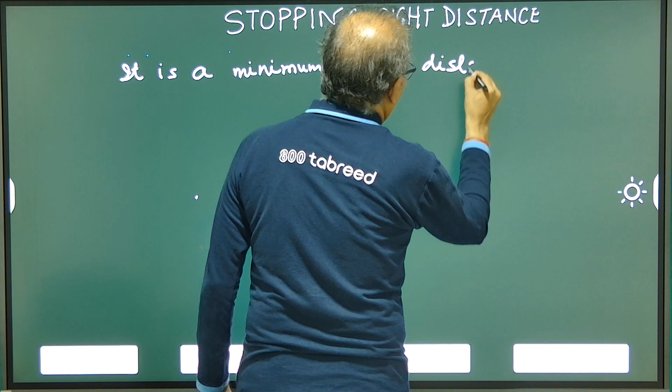Stopping sight distance: it is a minimum sight distance available at any spot of the roadway.

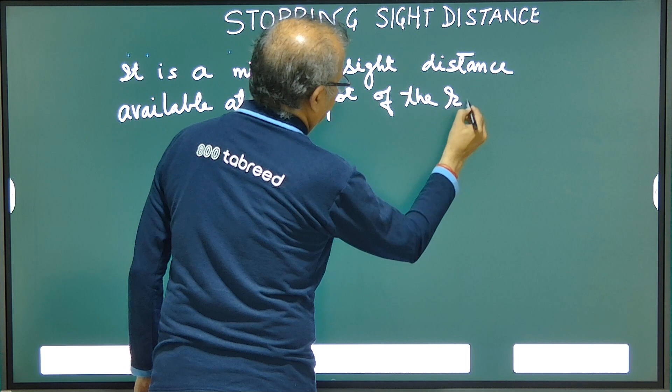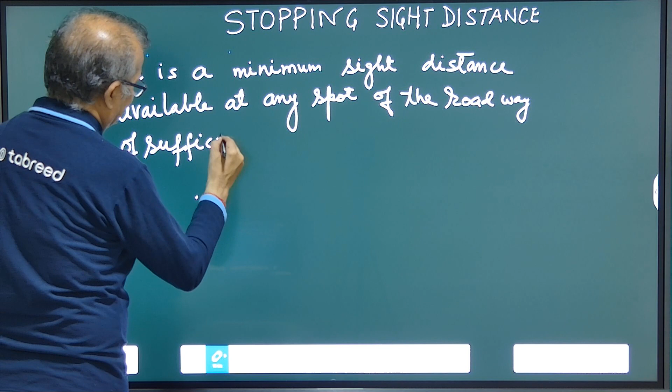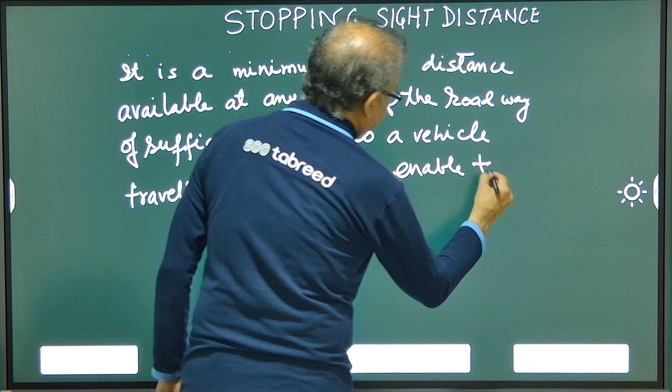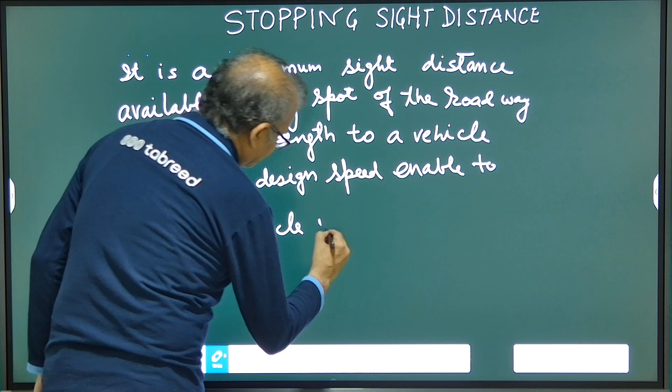Of sufficient length so that a vehicle traveling at design speed can stop upon seeing the obstruction ahead of him. So, of sufficient length to enable a vehicle traveling at design speed to stop the vehicle without collision with a stationary object.

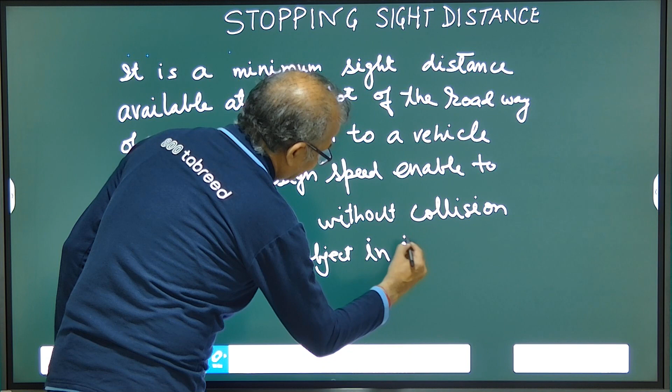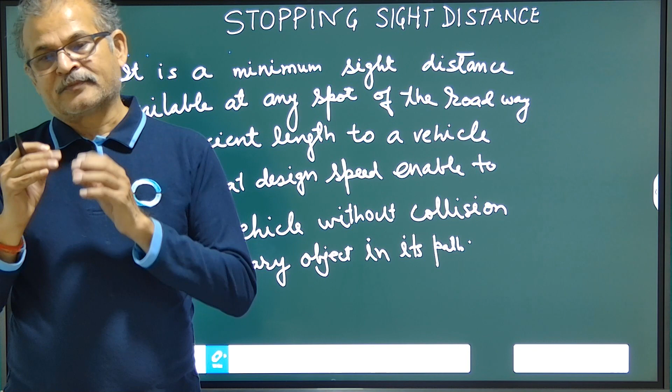In short, जब कोई व्हीकल ट्रेवल कर रही हो डिजाइन स्पीड से, तो जब कोई स्टेशनरी ऑब्जेक्ट देखे अपने रोडवे पे, तो उसके पास इतना सफिशिएंट लेंथ होना चाहिए कि वो अपनी गाड़ी को रोक सके। अब उसको दो पार्ट में उस लेंथ की रिक्वायरमेंट होती है। द मोमेंट वो व्हीकल जब किसी ऑब्जेक्ट को देखता है तो उसके मन में एक भावना आती है कि अब करना क्या है, गाड़ी को रोकना है या पास करना है, उसका एक टाइम उसमें चला जाता है।

जबकि जो व्हीकल होती है वो अपनी स्पीड से चल रही होती है, तो इस लैप्स टाइम, जिसे लैग डिस्टेंस भी कहा जाता है, कितना व्हीकल ट्रेवल कर लेगी उस लैग डिस्टेंस में, दैट इज बिफोर एप्लीकेशन ऑफ द ब्रेक। तो जो एक लेंथ ट्रेवल करती है वो, और फिर ब्रेक के बाद में जो काइनेटिक एनर्जी ऑफ द व्हीकल होती है उसके द्वारा अगेंस्ट द फ्रिक्शनल फोर्स जब तक रेस्ट में नहीं आती है, डिस्टेंस ट्रेवल करती है, तो दोनों को मिलाकर स्टॉपिंग साइट डिस्टेंस होता है।

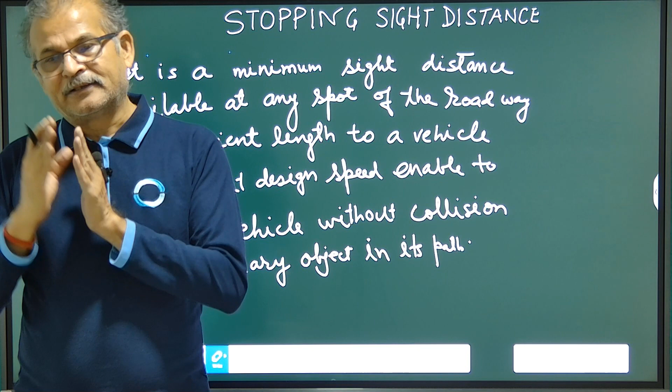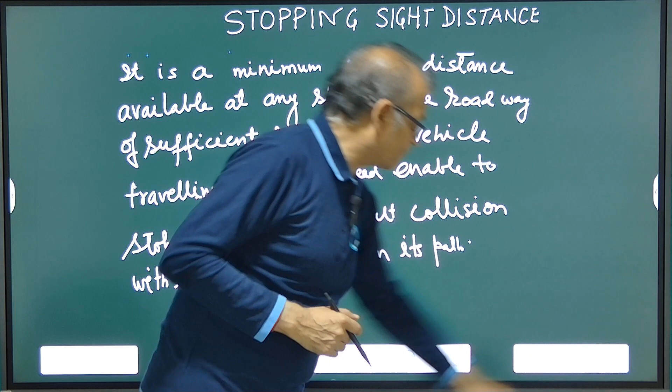तो स्टॉपिंग साइट डिस्टेंस दो कंपोनेंट में होगा। एक तो व्हीकल ट्रेवल ड्राइवर परसेप्शन एंड रिएक्शन टाइम, दूसरा अपॉन एप्लीकेशन ऑफ द ब्रेक, इंस्टेंट ब्रेक एप्लीकेशन करेगा तो व्हीकल कितनी डिस्टेंस पे जाकर के रुकेगी। तो दोनों डिस्टेंस के कॉम्बिनेशन को स्टॉपिंग साइट डिस्टेंस कहते हैं।

ये जो स्टॉपिंग साइट डिस्टेंस होगा, ये डिपेंड करेगा रोड के फीचर्स पे। वर्टिकल अलाइनमेंट है, हॉरिजॉन्टल अलाइनमेंट है या स्ट्रेट रोड है, तो इसका जो लेंथ होगा इट विल डिपेंड ऑन द रोड फीचर।

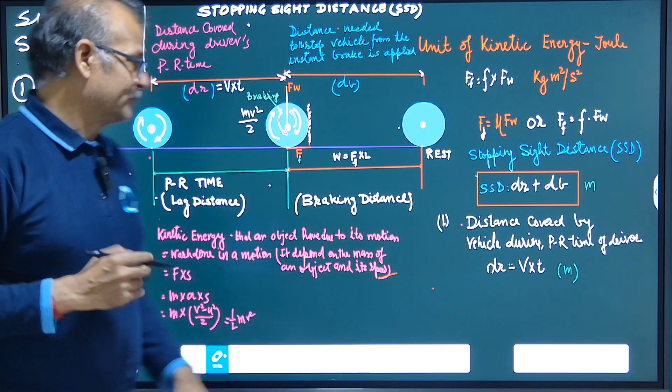और ड्राइवर की आई हाइट फ्रॉम द रोड सरफेस। ड्राइवर वो कितना ऊंचाई पे बैठा है, जिससे वो कितना लेंथ को देख सकता है। जितना ऊंचाई पे बैठेगा उतना ही रोड आगे ज्यादा विजिबल होगी। इट विल डिपेंड अपॉन द ड्राइवर आई फ्रॉम द रोड सरफेस।

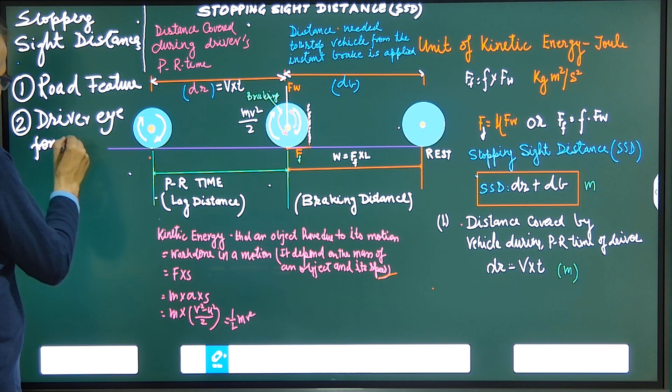फिर हाइट ऑफ द ऑब्जेक्ट कितना है, जो ऑब्जेक्ट को विजुलाइज किया जा रहा है कितना, तो उसके ऊपर भी डिपेंड करेगा। हाइट ऑफ द ऑब्जेक्ट।

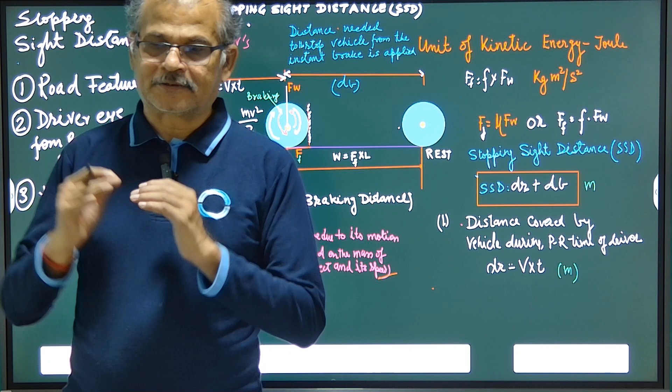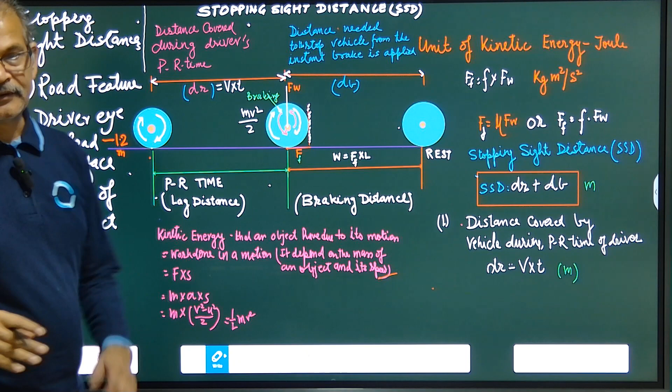IRC में, जो कैलकुलेशन पर्पज के लिए ऑल कैलकुलेशन में एक पैसेंजर कार को लिया गया है, जिसमें ड्राइवर की हाइट फ्रॉम रोड सरफेस 1.2 मीटर ली गई है। और स्टेशनरी ऑब्जेक्ट ऑन द रोड सरफेस उसकी जो ऊंचाई ली गई है दैट इज 15 सेंटीमीटर, यानी 0.15 मीटर ली गई है।

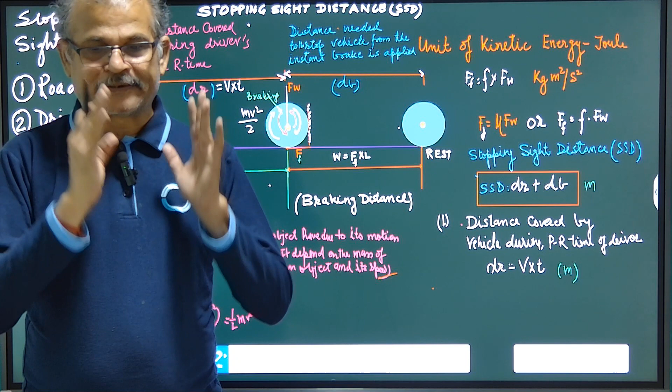तो जैसा कि हमने पीछे बताया कि जब कोई गाड़ी रोड पे ट्रेवल कर रही हो, अपॉन सीइंग एनी ऑब्जेक्ट, उसके पास एक टाइम जाएगा उसको परसीव करने पे, उसके रिएक्शन में, उसके एप्लीकेशन में, ब्रेक रिएक्शन टाइम, फिर वो ब्रेक लगाने में।

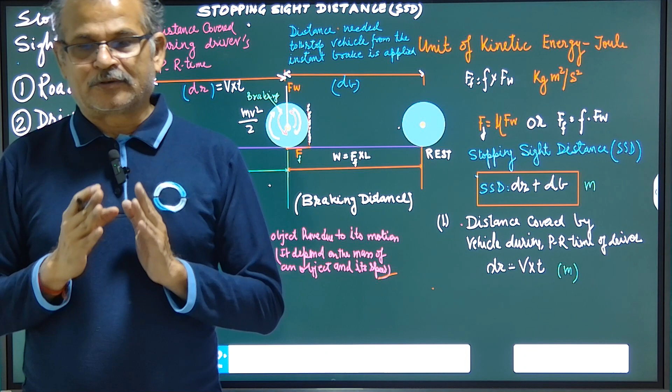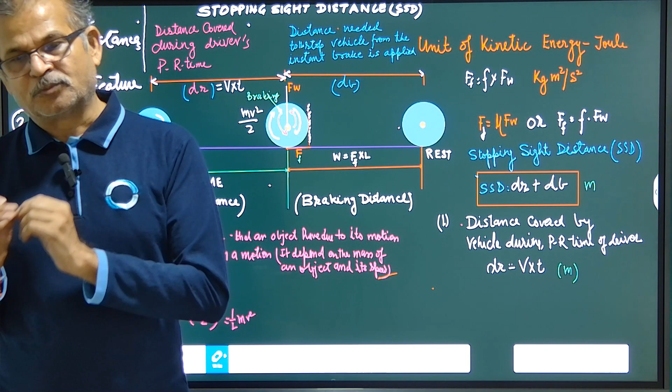तो दैट टाइम लैप्स इज नोन एज लैग डिस्टेंस। और इसको जो व्हीकल की वेलोसिटी होगी और टाइम लैप्स उसके मल्टीप्लिकेशन से पाया जाता है। तो वेलोसिटी ऑफ व्हीकल जो भी डिजाइन स्पीड होगी या जिस भी स्पीड से चल रही होगी, और उसका परसेप्शन टाइम जो कि 1.8 सेकेंड से 2 सेकेंड तक के बीच में होता है, पर फिर भी IRC में 2.5 सेकेंड दिया गया है। तो टाइम लैप्स विल बी 2.5 सेकेंड।

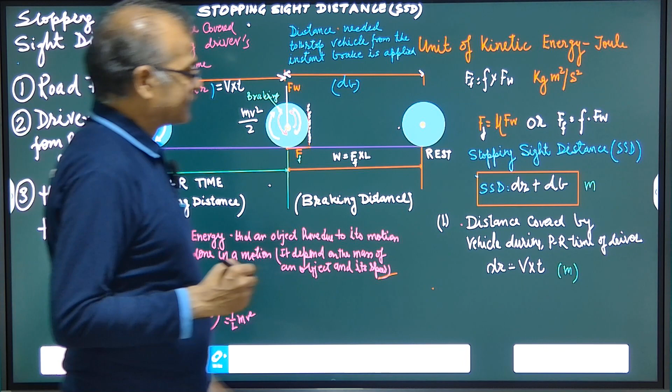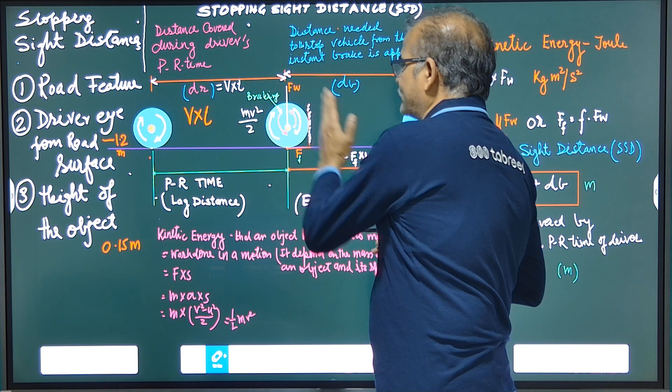So lag distance, distance covered during the driver's PR time - its value will be distance covered by the vehicle in PR time, that is given by dr, and it will be velocity multiplied by time. So dr will be equal to v into t, and the braking distance will depend upon the kinetic energy of the vehicle। और जब काइनेटिक एनर्जी को हम स्टॉप करते हैं ड्यू टू ब्रेकिंग फोर्स, तो ये गाड़ी रेस्ट में आएगी ड्यू टू frictional force applied between the tire and the road surface.

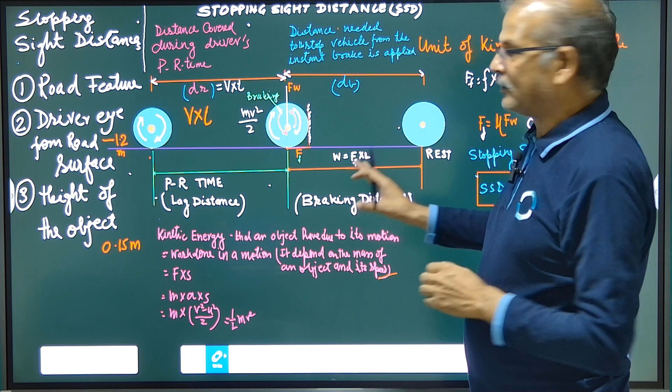So how to find out braking distance? Let us see the calculation of braking distance.

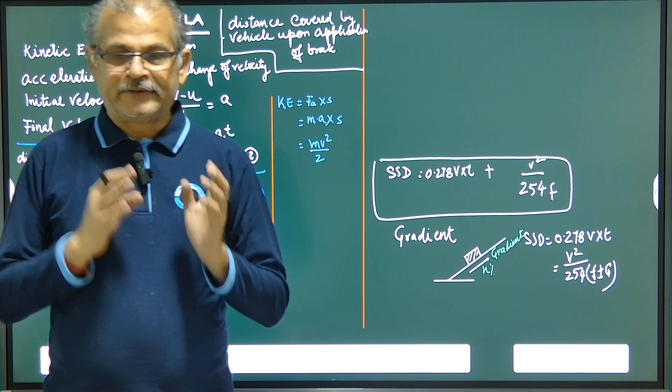So we know that acceleration होता है rate of change of velocity। तो मान लीजिए कोई व्हीकल की इनिशियल वेलोसिटी u है, फाइनल वेलोसिटी v है, तो v माइनस u, फाइनल वेलोसिटी माइनस initial velocity divided by time will be known as acceleration. So v is equal to u plus at - that is kinetic motion का फर्स्ट लॉ भी है। How we derive it? If initial velocity is u, final velocity is v, so v minus u by t will be the acceleration, and then v is equal to u plus at, and we find out time v minus u over a.

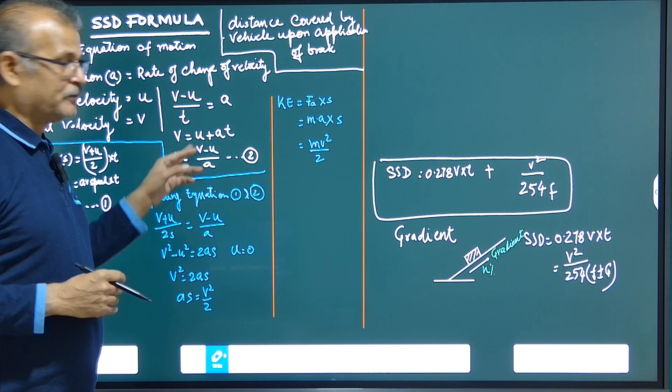Now second, we know that distance is velocity into time, or speed into time.

There will be average speed, initial speed when the vehicle has started, and the final speed where we are making the measurement. So average speed will be, if initial is u and final is v, plus u by 2, and time taken by that vehicle is t. So v plus u divided by 2 into t is equal to s, means distance will be average speed v plus u divided by 2 into time. So we can find out 2 into s upon v plus u will be the time.

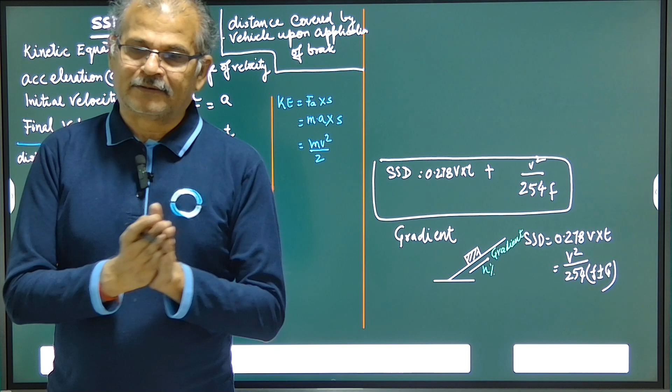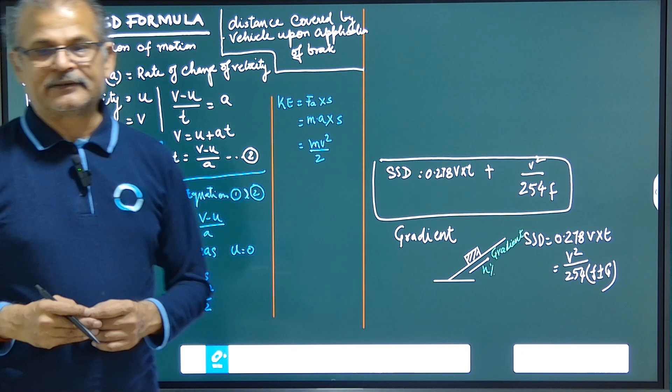Since initial velocity of any vehicle would have been zero only, it started from zero, accelerating in time t to v. So u will be 0, v square equal to 2as, or we can say as is equal to v square by 2. Now work done, we know the kinetic energy is work done in motion. Any moving body, as much distance it covers, that is work done by that vehicle in motion. So kinetic energy is work done in motion, that is force due to acceleration into distance.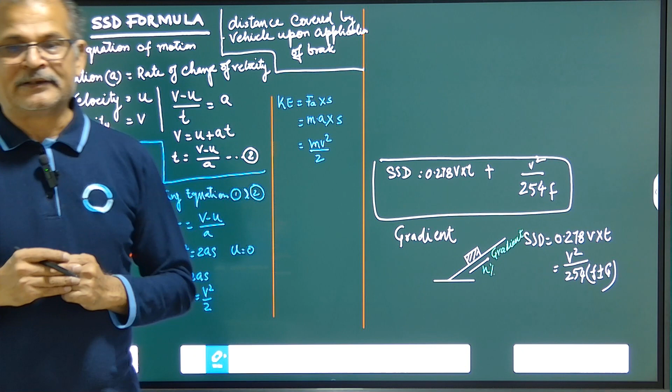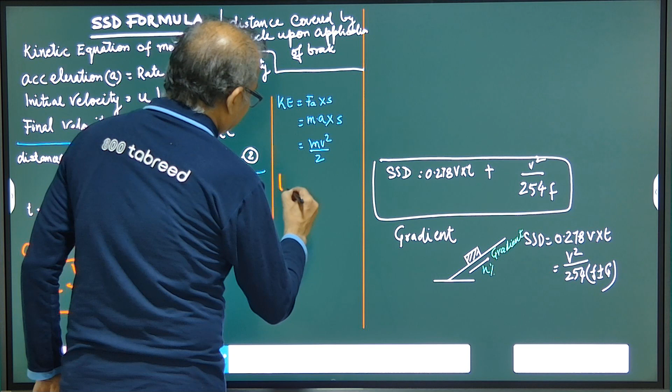So force due to acceleration is Fa into s, and we know Fa is nothing but m into a into s, and we found out as is v square by 2. After putting the value of v square by 2, we found kinetic energy Ke is equal to mv square by 2.

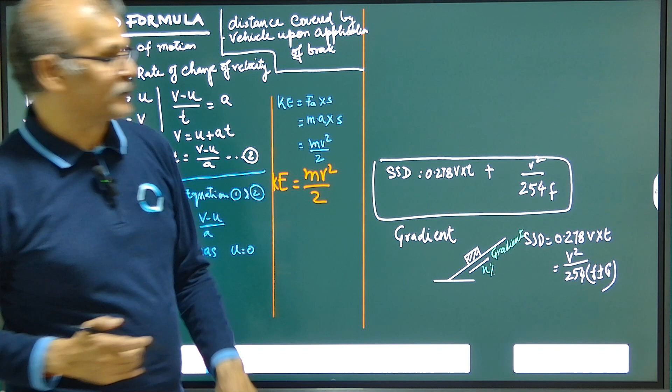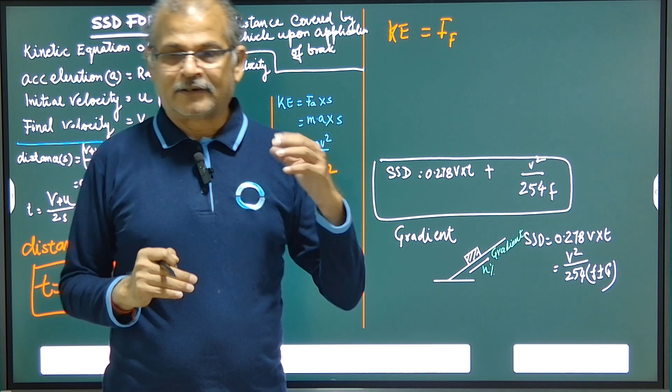Now this mv square by 2 will be, when the brake has been applied, it will be resisted by the frictional force. Vehicle will come to stop after the kinetic energy is exhausted due to frictional force. So kinetic energy will be equal to frictional force due to road surface and the tire into distance covered.

So the braking distance will be L, or we can say distance due to braking db. So Ke we found is mv square by 2. F we already know the relation between F and the gravitational force, means weight of the vehicle. So mu is equal to...

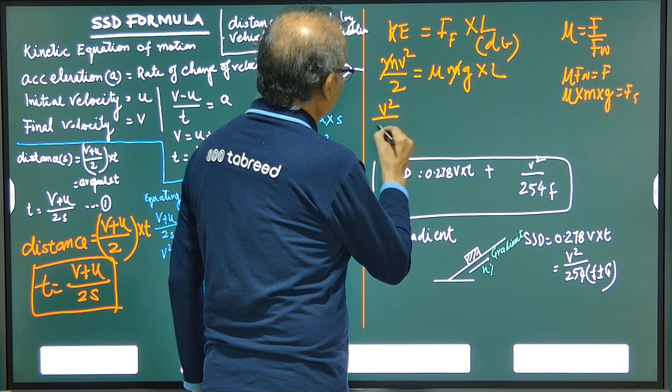F upon gravitational force due to the vehicle's own weight. So mu into Fw is equal to F, and Fw is nothing but gravitational mass into g, m into g is equal to F. So let us input mu into m into g into L. M gets cancelled. Now v square upon 2 mu into g is equal to L, or db, distance covered by vehicle after application of brake.

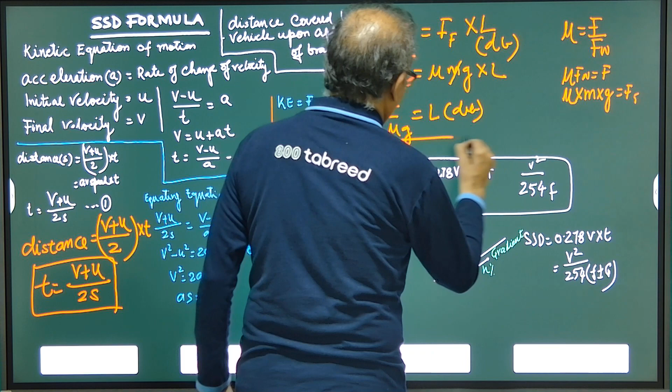So in this case, stopping sight distance will be the lag distance, that is v into t. So stopping sight distance will be equal to lag distance v into t, plus braking distance v square upon 2 mu into g. Mu is also coefficient of friction, also represented by F.

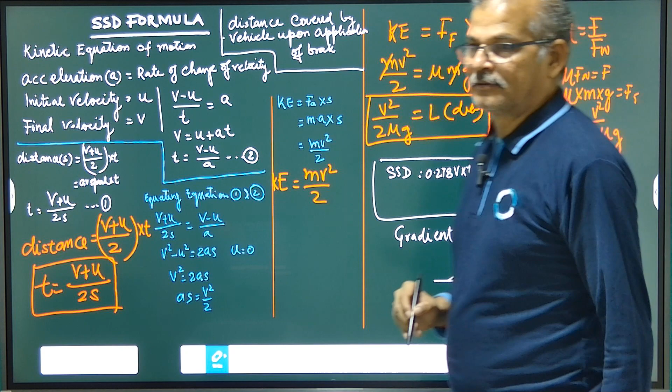Friction coefficient F is taken in highway engineering, so we can replace mu by F. So Vt plus v square upon 2F into g. Now velocity v is in meter per second, t is in second, g is in meter per second square, and v is again in meter per second.

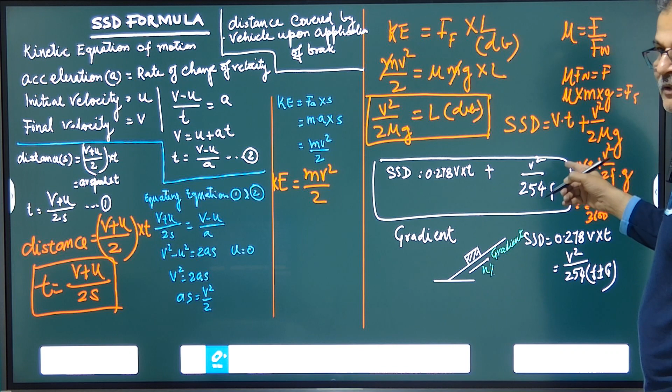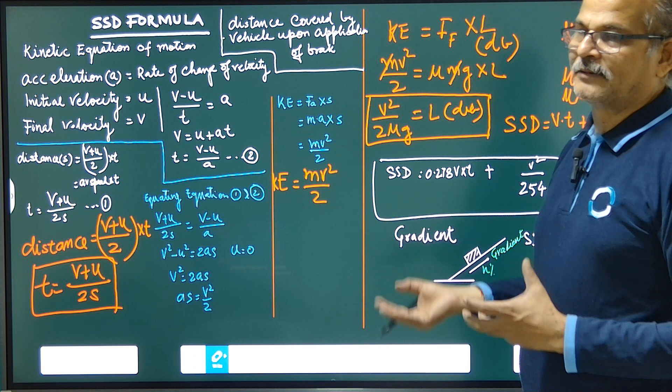But generally the velocity or speed of the vehicle is given in kilometer per hour. So it can be converted into kilometer per hour by converting this: 1000 upon 3600, 1000 meter per 3600 seconds. So it can be directly input in kilometer per hour. 1 kilometer is 1000 meter, and the time taken is 3600 seconds in traveling that 1 kilometer. So we can directly put the value of v in place of v.

If vehicle is traveling at 100 kilometer per hour, into 1000 divided by 3600, we get the value of 0.278v. Means if here we put the kmph, so we get 0.278 into 100 into t in second, we get the lag distance directly.

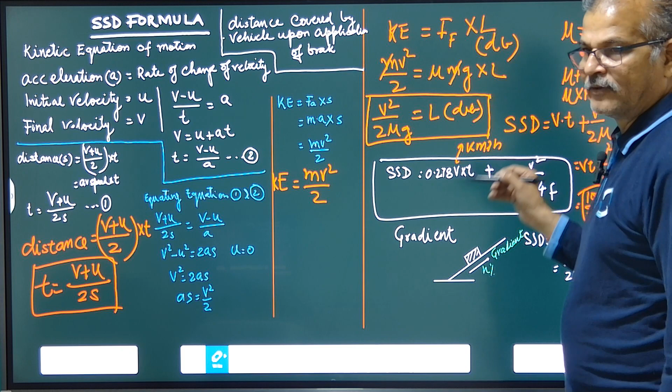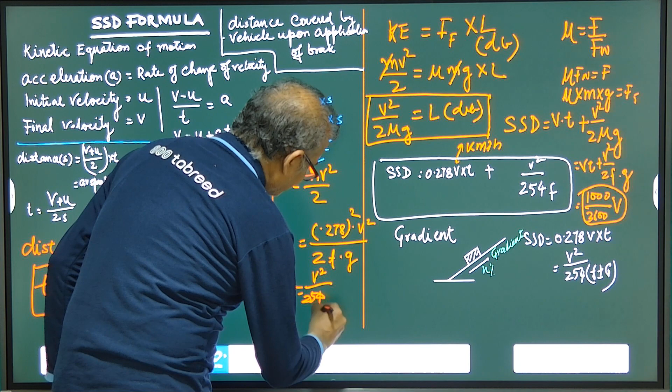Similarly, v square, if we put value of v in kilometer per hour, so v square upon 254. If we solve it, we find 0.278 whole square into v square upon 2 mu g, upon 2f into g. So it will be v square in kilometer per hour upon 254f. So we can solve, and the equation is...

For stopping sight distance when the speed of vehicle is given in kilometer per hour: 0.278 into speed in kilometer per hour into t in second, plus v square, v will be in kilometer per hour, square it, divide by 254 into coefficient of friction. Coefficient of friction f for 100 kilometer per hour is 0.35, for 40 kilometer per hour it is 0.4. So the coefficient of friction value keeps increasing as the speed decreases.

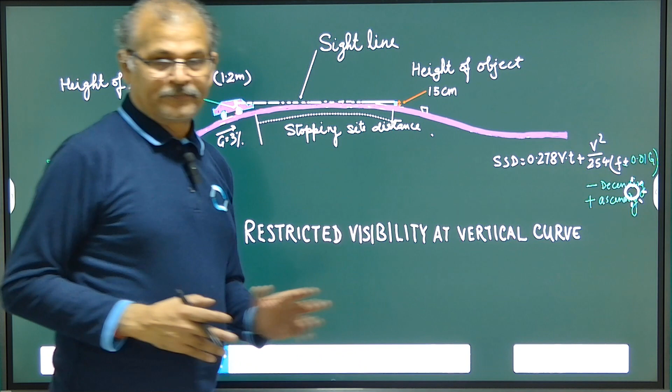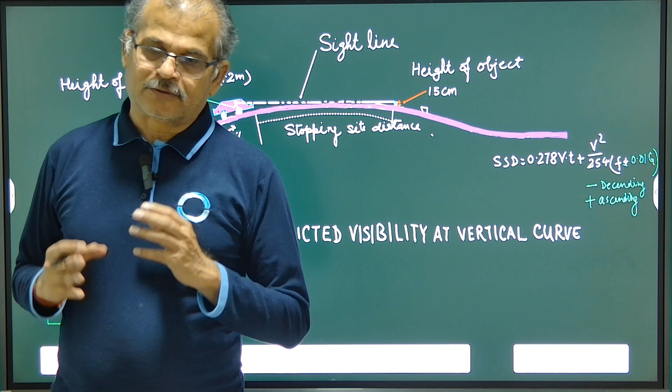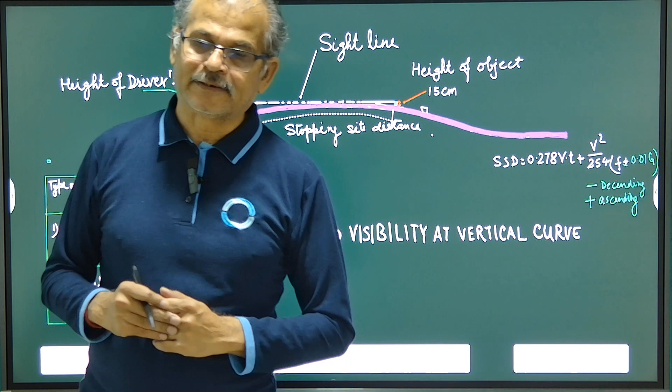So now if any vehicle is going on the gradient, if it is in the ascending gradient, meaning it is going uphill, then due to that gradient the stopping sight distance will be reduced. So we can take g plus, that will be added. So stopping sight distance equals v square upon 254 (f plus or minus 0.01G). We can directly put the value of gradient multiplied by 0.01. When it is ascending, it will be plus. When it is descending, it will be negative, meaning it will require more length for getting stopped when the vehicle is descending.

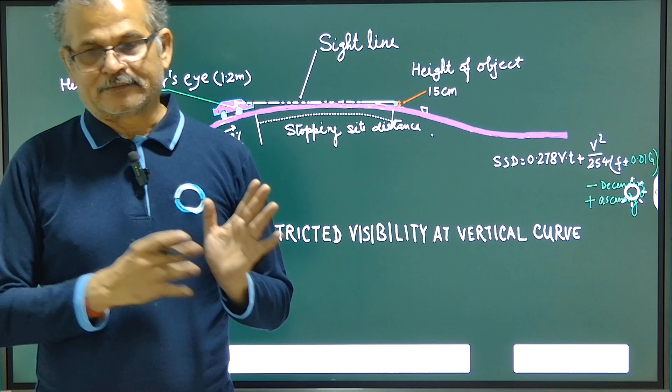So this correction is done while doing the calculation for the vertical curve, where there will be ascending and descending gradient. Accordingly, a correction is done depending upon the grade of the ascending or descending.

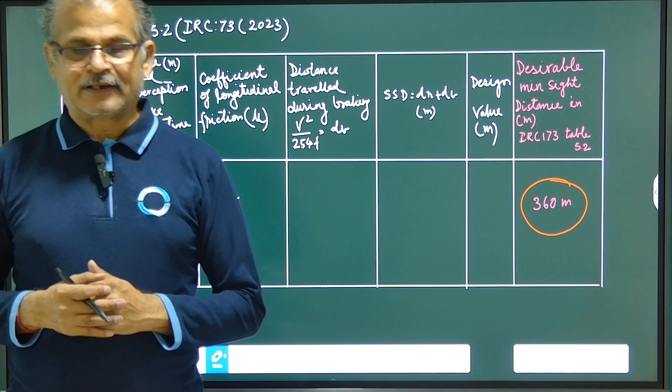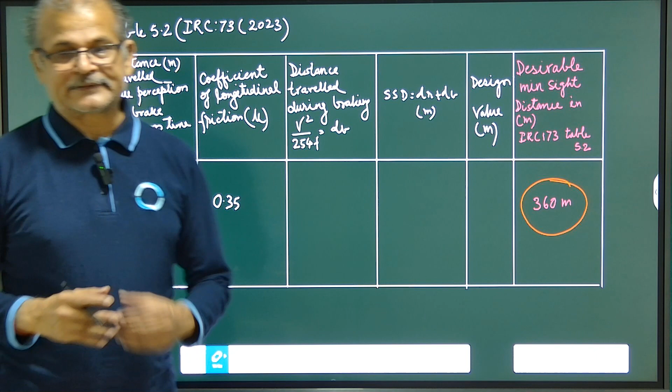Let us look at Table 5.2 of IRC 73, which gives for different speeds how much sight distance will be required to take into consideration while designing the highway. Let us solve one example: 100 km per hour. When a vehicle is traveling at 100 km per hour, how much lag distance will be required, how much braking distance will be required, and what is the provision given in the IRC.

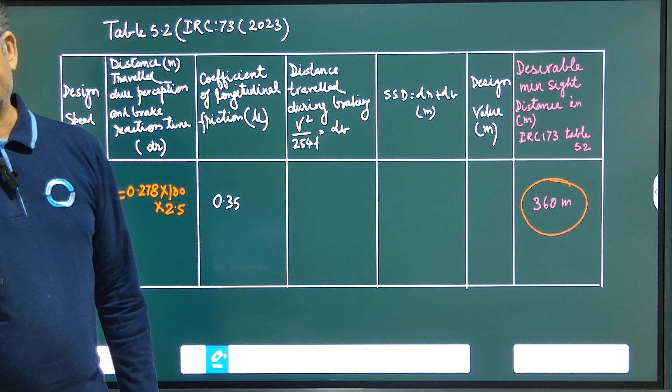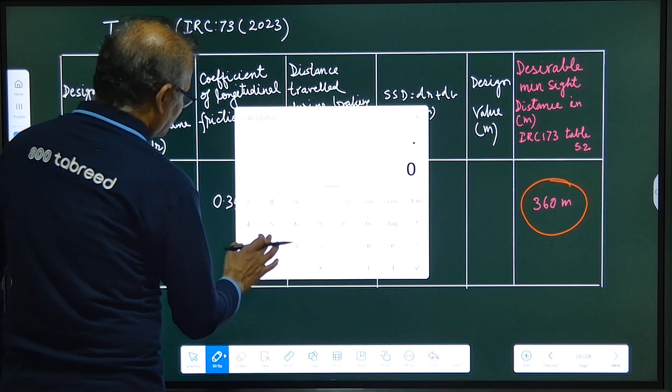Distance in meters traveled due to perception and brake reaction time, that is distance traveled by the vehicle during perception and reaction time. This will be 0.278 into 100 km per hour into 2.5, that is the perception and reaction time of the driver. So this will be equal to 0.278 into 100 into 2.5 equals 69.5 meters.

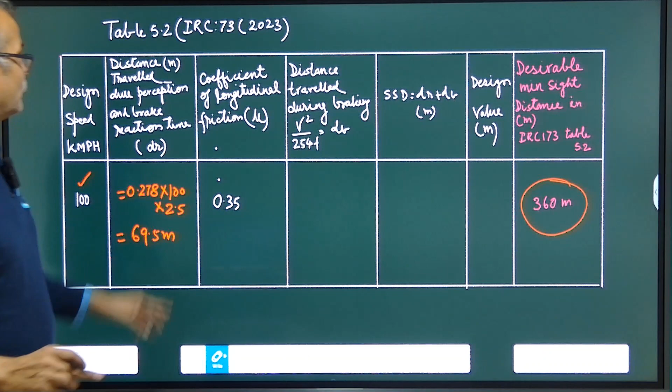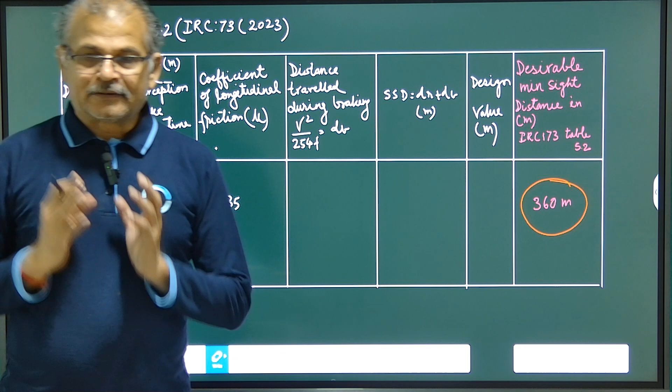Lag distance will be 69.5 meters, and coefficient of longitudinal friction is given as mu. So how much distance will it travel upon the application of brake? This is given by v square upon 254 divided by f, and the value of coefficient of friction is given as 0.35 for 100 km per hour. So v square, 100 into 100, upon 254 into 0.35. This will be the braking distance.

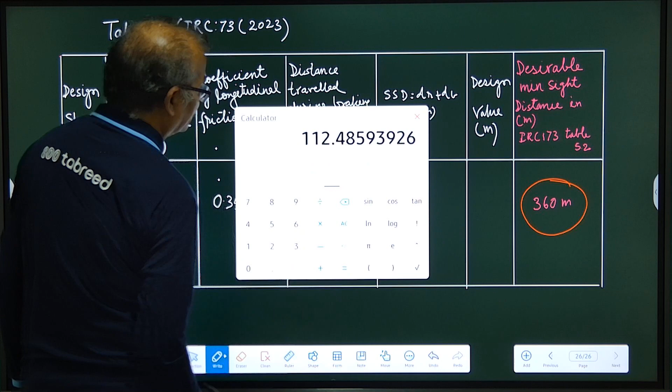So 100 into 100 upon 254 upon 0.35, so braking distance will be 112.48 meters.

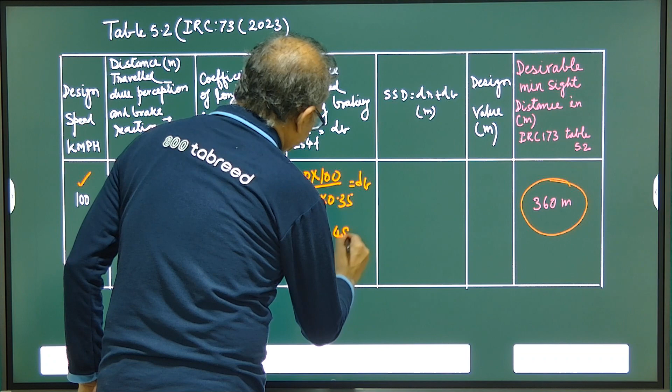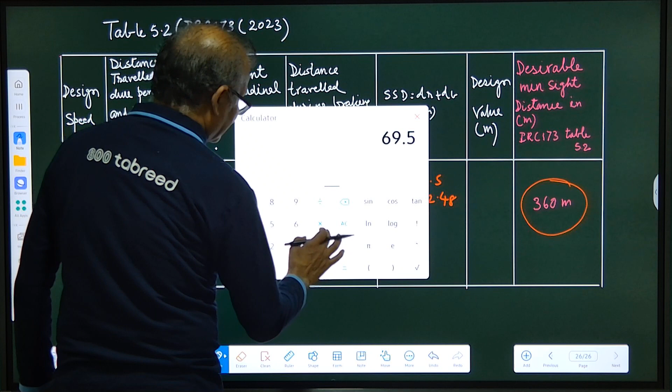112.48 meters. So SSD, stopping sight distance, will be the lag distance plus braking distance. So SSD will be equal to 69.5 plus 112.48, which will be equal to 181.98. So design value can be taken as 180 meters.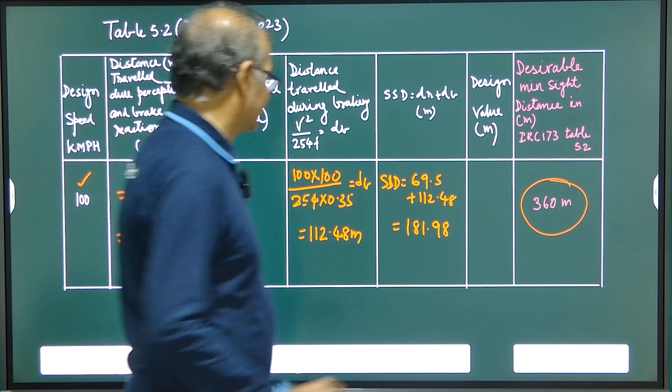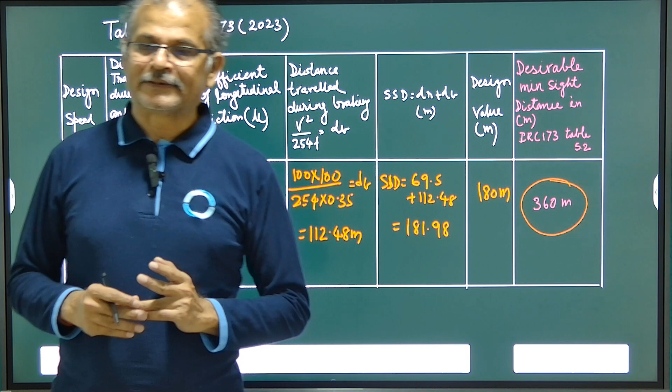Whereas in IRC it is desirable to have 360 meters of stopping sight distance while designing any curve, any vertical curve, or straight length of the road. So 360 meters should be considered for stopping sight distance of a vehicle, as provisioned in IRC 73.

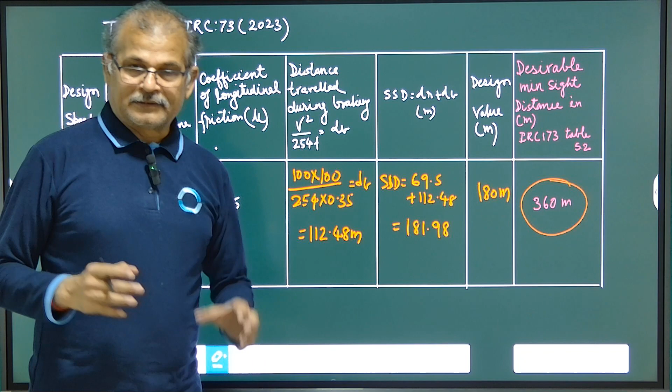So with this video, I understand the stopping sight distance concept will be clear, and this will be an important slide.

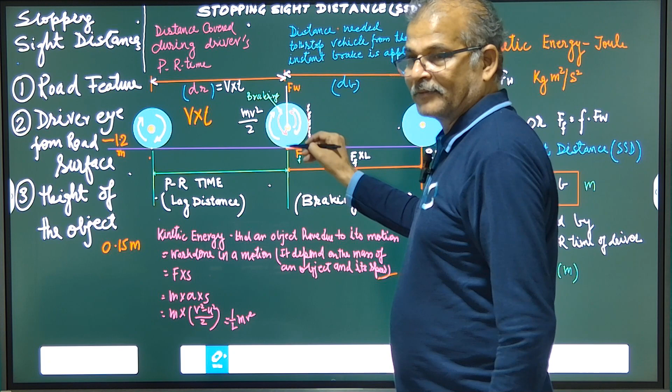This will be the important slide where a traveling vehicle covers distance during the PR time of the driver, that is v into t. Once the brake has been applied to the vehicle, it will skid and come to rest due to frictional force, so kinetic energy equals work done by the frictional force. That frictional force does work till the vehicle comes to rest, and during that period a distance is covered by the vehicle, that is braking distance. So lag distance plus braking distance will be the stopping sight distance.

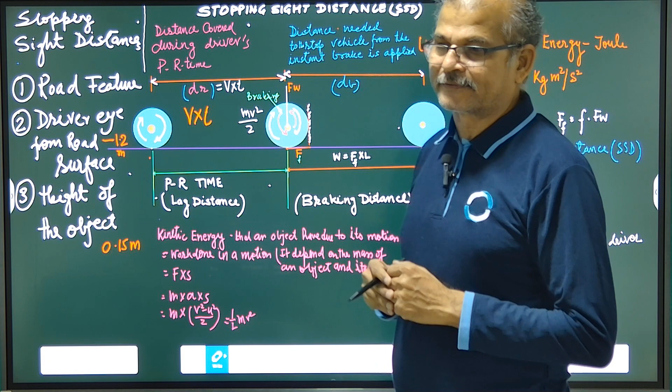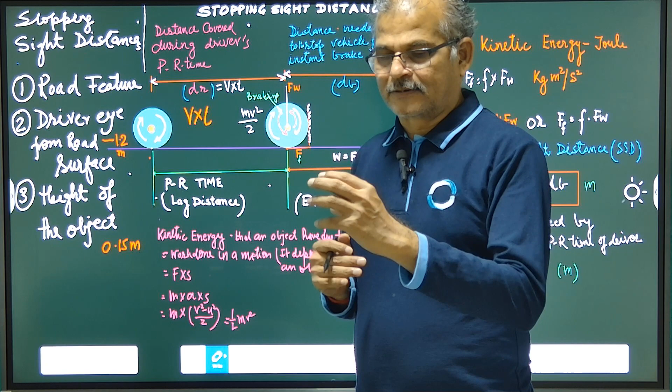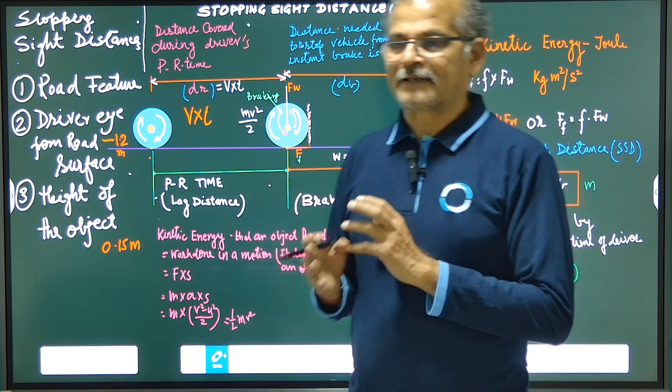So we calculated how to find lag distance and braking distance from first principles of kinetic energy. Kinetic energy is equal to the work done during the vehicle's application of brake due to skidding and frictional force developed between the tire of the vehicle and the road surface, that is frictional force into the distance covered by the vehicle during the braking duration. It will depend on the condition of the road, coefficient of friction of the road surface, velocity, etc.

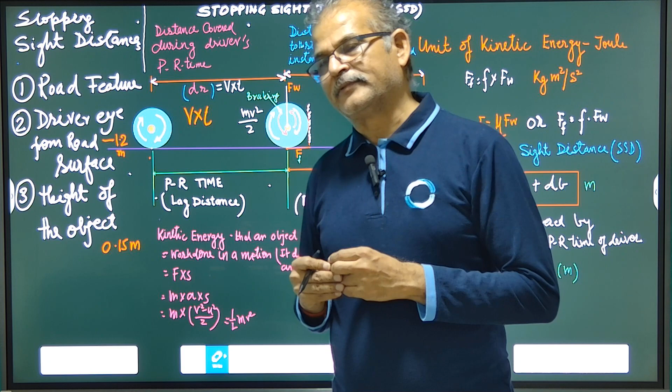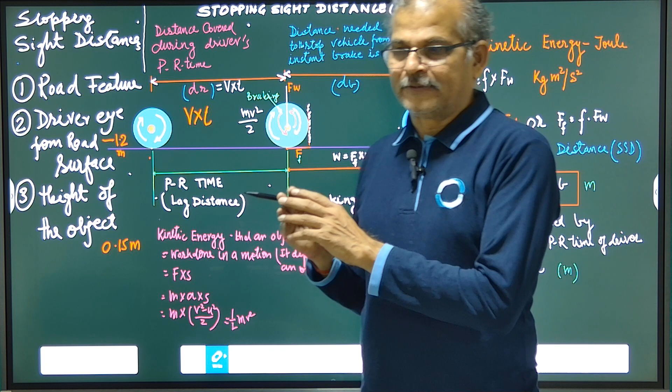So we find out how much the distance will be. This will be v square upon 2 mu into g, and since v is in kilometers per hour, it can be converted, so directly the value can be input. If we input the value, it comes to 0.278 into v in kilometers per hour into P-R time, which is 2.5 seconds, plus v square upon 254 into f, where f is coefficient of friction. Generally for 100 km per hour it is 0.35, and if the speed decreases, the value of coefficient of friction will increase. By giving input of these values, we find out the stopping sight distance.

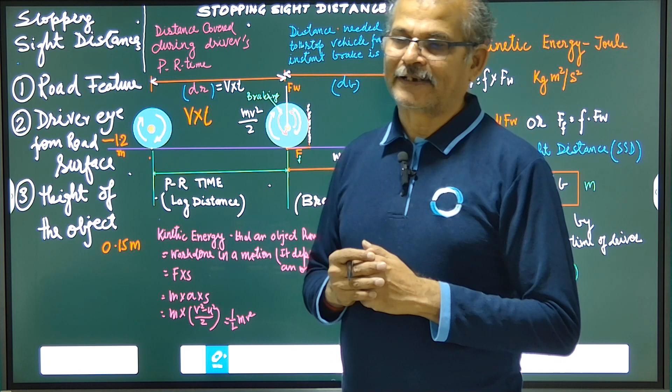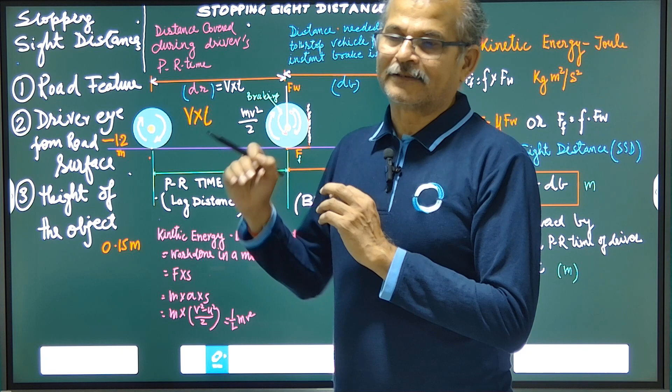When the vehicle is ascending a gradient, f plus the n% whatever gradient is given, and if it is descending, it will be minus. Meaning if the vehicle is ascending, less stopping sight distance will be required; once the vehicle is coming down, more stopping sight distance will be required to stop the vehicle. So with this, I understand the concept of stopping sight distance will be clear to you all. Thank you.